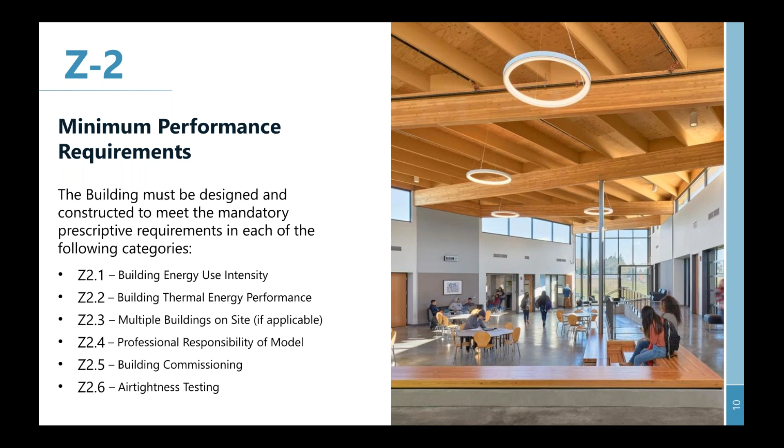Drilling down into building energy use intensity, the performance index known as the ZEPI index is expressed by the EUIP divided by the EUI times 50.4. The EUIP is the energy use intensity for your proposed design, and the EUI is a baseline calculation based on source EUI. This is a lot different than what has been used in the past.

Generally, when projects have calculated the baseline energy use intensity, it's been based on just the site, but in this calculation, it takes into account not only the site, but the efficiency of the source. So the ZEPI number is the EUIP divided by the EUI times 50.4, a dimensionless number, and that number must be less than or equal to 30 to be in compliance.

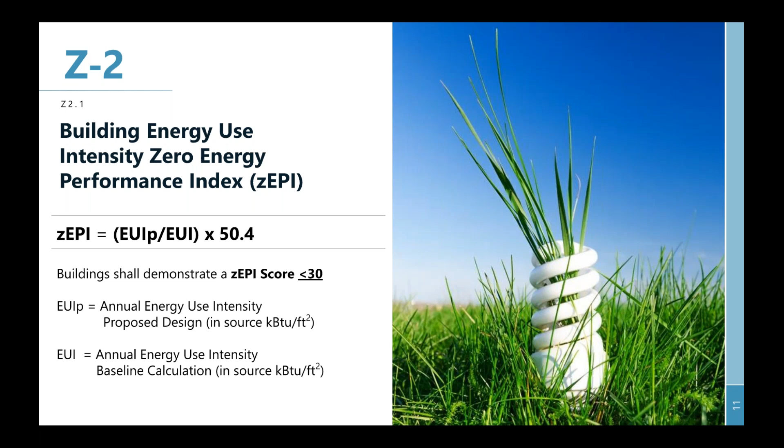The calculation parameters must be done in accordance with Appendix G, ASHRAE 90.1 2016. Again, the current code, if you were to follow a LEED compliance path, is 2013. The appendix, the ASHRAE 2016 version, is quite a bit different than 2013. The methodology used to determine the EUI is very different, and overall the 2016 code is more stringent.

Modeling inputs must be in accordance with the ComNet Rules and Procedures Manual. I've provided that link. So for calculating the annual energy use indices, electrical energy shall be converted from kWh to kBTU units, 1,000 British thermal units, measured at the utility meter or metered point of delivery. This value shall be multiplied by the dimensionless conversion factor of 3.28, site source factor based on the eGrid subregion 2010 RFC East, as stated in table Z2 1.2.2 of Appendix Z.

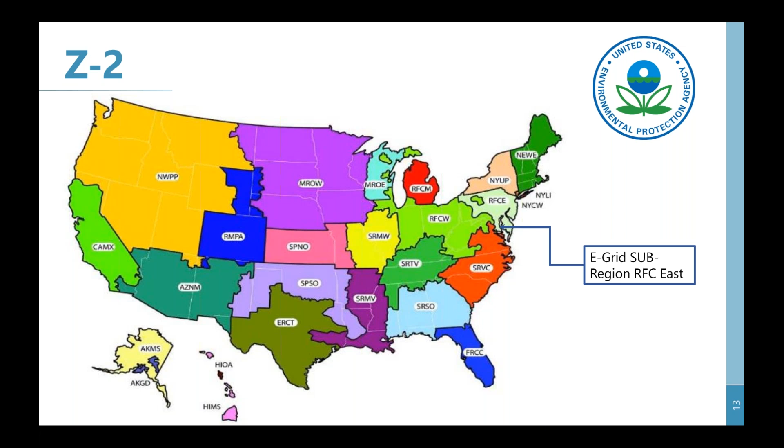Going further into section Z2 for building thermal energy performance, not only does the overall project need to demonstrate a level of efficiency based on that ZEPI number, but in addition, you also need to demonstrate that you are under a maximum annual heating demand of 4.2 kBTUs per square foot per year, and under a maximum annual cooling demand of 6.4 kBTUs per square foot per year. Based on ICFA, the interior conditioned floor area, is how the methodology for determining the square footage works. So those are two critical numbers, 4.2 for heating and 6.4 for cooling.

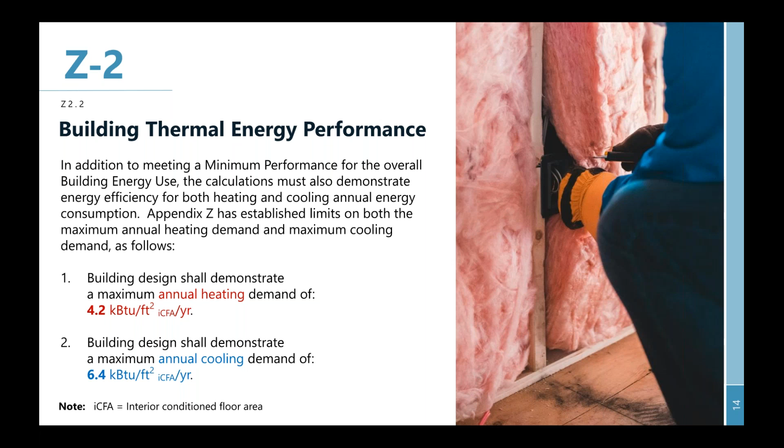When you have multiple buildings on one site, each building must comply with sections Z2.2.1 and Z2.2.2 within Appendix Z, or the combined demands of the buildings on the site shall comply. So each building site employing district energy systems, the energy shall be assigned to each building proportionally based on the gross area. So if you had an on-site heating plant, you would distribute that energy, or that demand I should say, across each of the buildings based on the proportion area.

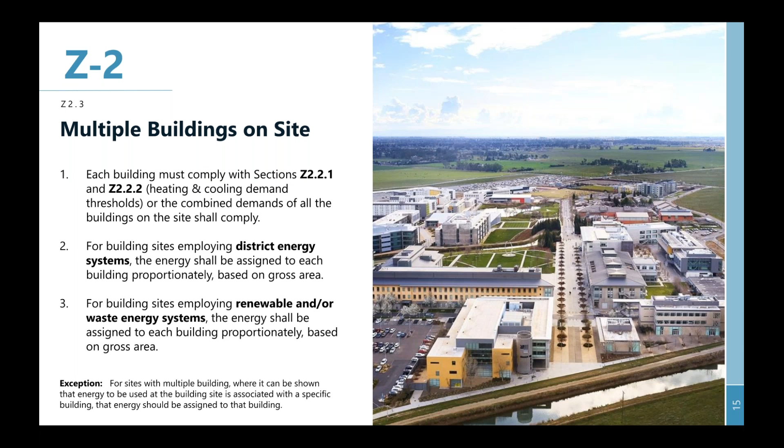So for building sites employing renewable and/or waste energy systems, the energy shall be assigned to each building proportionally based on gross area. The exception is where it can be shown that the use of the building on the site is associated with a specific building.

Another requirement of Appendix Z is that a registered design professional be in responsible charge of the building energy simulation. So the owner shall engage the services of a registered design professional in responsible charge of energy simulation. The registered design professional shall be named on the permit application, and the design professional shall be certified by an approved accredited entity as determined by the code official.

The owner will be required to notify the code official in writing whenever that registered design professional is changed or unable to continue to perform his or her duties. So through this Appendix Z, they're really elevating the significance of the energy model and the qualifications of the individual or individuals producing these energy models, and also ensuring that these individuals are carrying through the entire project. And if not, it needs to be communicated to the district.

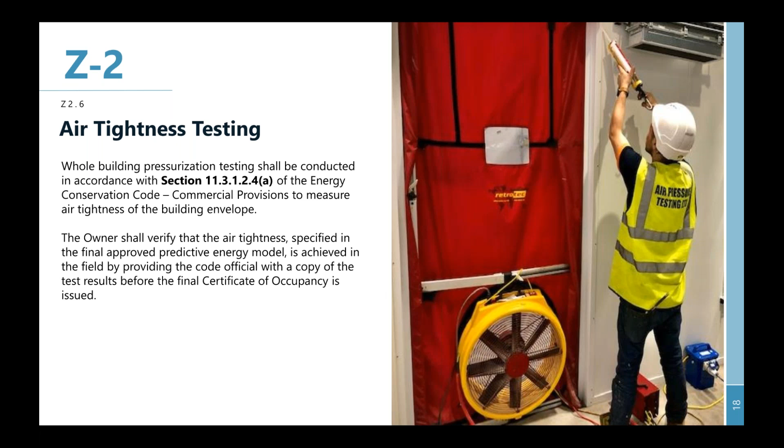The owner shall verify that the air tightness specified in the final approved predictive energy model is achieved in the field by providing the code official with a copy of the test results before the final certificate of occupancy is issued. What this means is assumptions are made in the energy modeling regarding how tight the building is. This air tightness testing must verify that you are achieving at least that level of tightness. If those two things don't match up, it is possible that you may not be issued your certificate of occupancy.

I'm going to turn it over to my colleague Kulai to take us through Z3.

Okay, so Z3 is dealing with renewable energy, and it's looking at the building and the site around the building for the total power generation. These formulas are formulas that we produced, you're not going to find them in Appendix Z. PG is power generation, and power generation is made of power generation on site plus power generation off site. The power generation you calculate needs to demonstrate that it is bigger or equal than the energy use intensity proposed for the project.

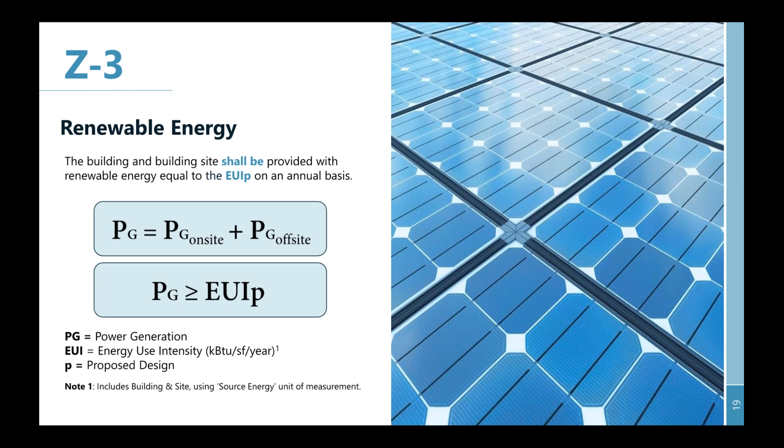The second requirement on Z3 refers to on-site combustion. The on-site combustion of fossil fuels will not be permitted for the provision of thermal energy to the building, except as specified by the code official. In other words, natural gas generation for thermal use should not be used anymore, and electrification should be provided for the building itself.

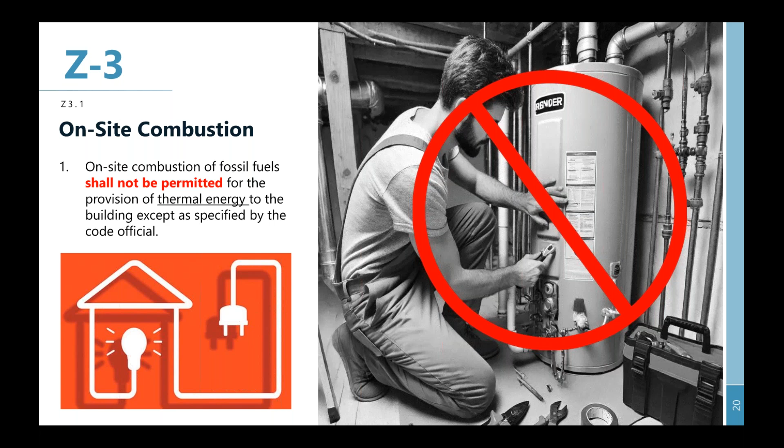Sorry. That's one. That's just slow, sorry.

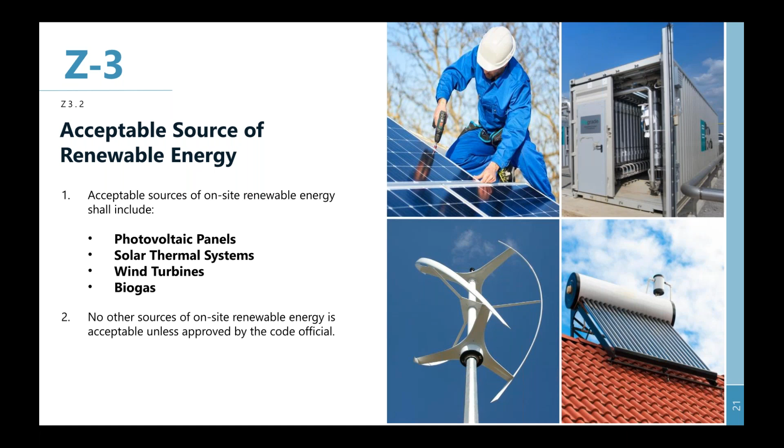The renewable energy on site: how is the quantity of renewable energy on site determined? The on-site renewable energy shall be generated whenever feasible, and 'feasible' is quite loose, it could be interpreted various ways. But numbers 2 and 3 specifically ask for specific numbers: a minimum of 5% of the total building energy consumption, EUIp, shall first be met by an acceptable source of renewable energy installed on the building roof or site. So they are very specific, 5%.

Now, for a project generating on-site renewable energy through a solar photovoltaic system, a minimum of 25% of the total site area, including building footprint, shall be allocated. It doesn't say that you have to put 25%, as long as the EUIp is met, I think they are okay with that. The exception here is where there is no adequate solar access as determined by Chapter 13 of the Energy Conservation Code commercial provisions, you don't have to meet this requirement.

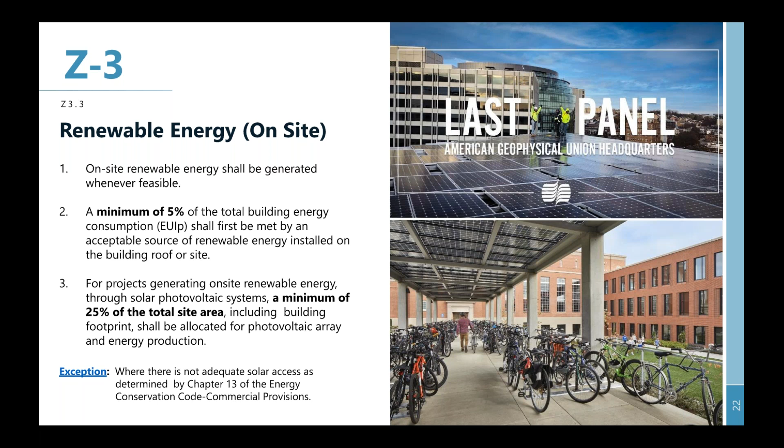For renewable energy off-site: if you determine that on-site is not possible to provide enough renewable energy, then Appendix Z allows you to purchase renewable energy from off-site. Energy must be procured from a qualified electricity supplier providing energy from Tier 1 renewable energy sources, meeting the minimum percentage of DC's renewable portfolio standard. DC provides the renewable energy portfolio standards every year, indicating a long list of suppliers of Tier 1 renewable energy. Tier 1 means the suppliers provide renewable energy by PV, thermal solar, biogas, wind, and also hydroelectric.

But the hydroelectric needs to be less than 30 megawatts. I don't know many hydroelectric plants around our area that are capable of providing less than 30 megawatts.

The following methods of procurement are acceptable: power purchase agreement, which is the most used in the area, for a minimum of 5 years from solar or wind facilities located in the DMV area, connection to a renewable energy microgrid, and connection to a low carbon neighborhood thermal energy system. I don't know too many energy microgrids or low carbon neighborhood thermal energy systems in our area yet.

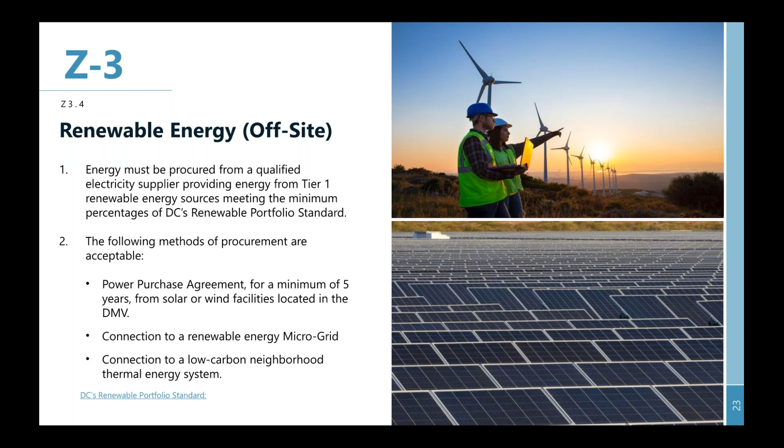Moving on to the requirements of Z4, energy metering, monitoring, and reporting. These requirements apply to all projects using Appendix Z to ensure that buildings are constructed or altered with the capability of measuring, monitoring, and reporting on their energy use, production, and reclamation.

This includes the design of energy distribution systems to allow for the isolation of load types, the installation of meters, devices, and data acquisition systems, and the installation of energy displays and other reporting mechanisms.

So not only do we need to provide metering for the systems, but under Appendix Z, they're looking to be able to isolate the specific load types.

Can I say something?

The submetering system they are looking for is usually by separating the loads into receptacle, HVAC, lighting, and equipment, and that can be done easily by designing your distribution so that it's separated by that type of load.

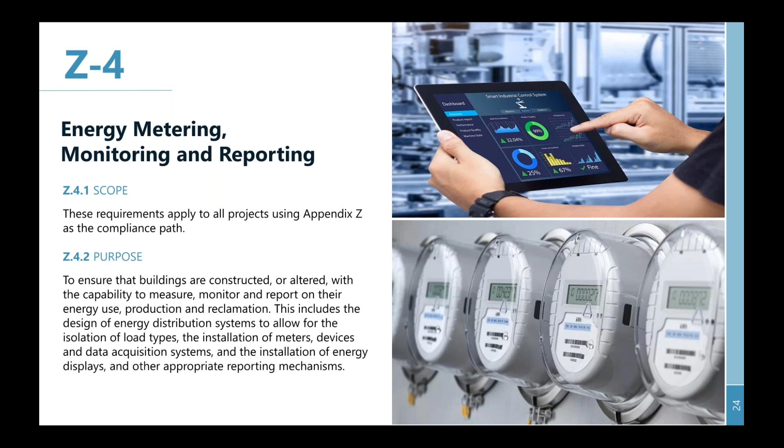And so all forms of energy delivered to the building site, or produced by the building site or in the building, shall be metered, and all energy load types measured.

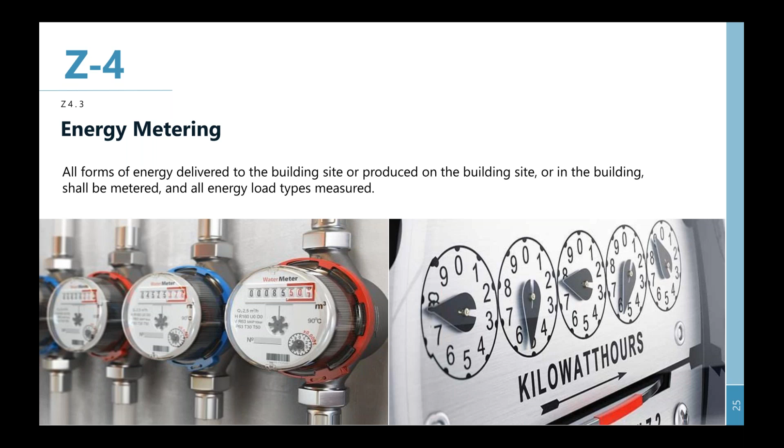So within the ventilation system, part of the code is they're looking to understand the ventilation rates into the individual buildings, and looking to have the ability to not only measure how much ventilation is coming into the building, but to maintain historical data regarding these ventilation rates.

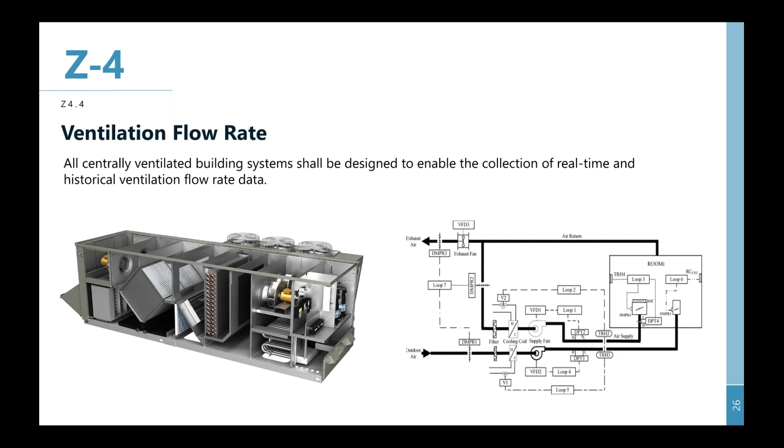So within the building's mechanical systems, we must have devices capable of measuring and reporting that flow, such as airflow measuring stations associated with a DOAS unit. The building would be an example.

You want to talk about grid integration? Sure. In places where there are equipment constraints in the distribution network, net metering is impossible to provide because the utility doesn't accept it for some reason, the on-site storage option shall be considered.

Something I want to underline is that this is the only location in Appendix Z where they talk about on-site storage. I'm not so sure how they are looking at it, other than when net metering is impossible on site, they are going to react. These systems are expensive, they are very difficult to control, and they require a lot of specialty equipment to be monitored.

I think it's one area within Appendix Z where there's a little bit of leeway. It's essentially saying you must net meter the building, and if for whatever reason you cannot net meter the building, that you should consider on-site storage options. It doesn't say you must implement on-site storage options.

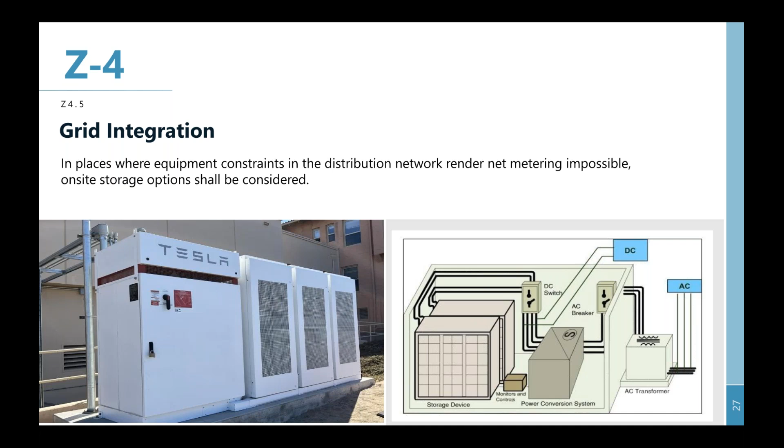So Z5, post-occupancy measuring and reporting. This is post-design, post-construction, when the building is now operational.

There is a requirement for the owners to annually benchmark and report on their energy and water performance through the Energy Star Portfolio Manager tool, and this includes the renewable energy generation and green power usage pursuant to DCMR 20-3513.

And performance verification: within 24 months of occupancy, the owner shall submit documentation demonstrating 12 months of continuous operation with no less than 90% occupancy, where the energy consumed by the building and the building site is equal to or less than the renewable energy associated with the building and the site.

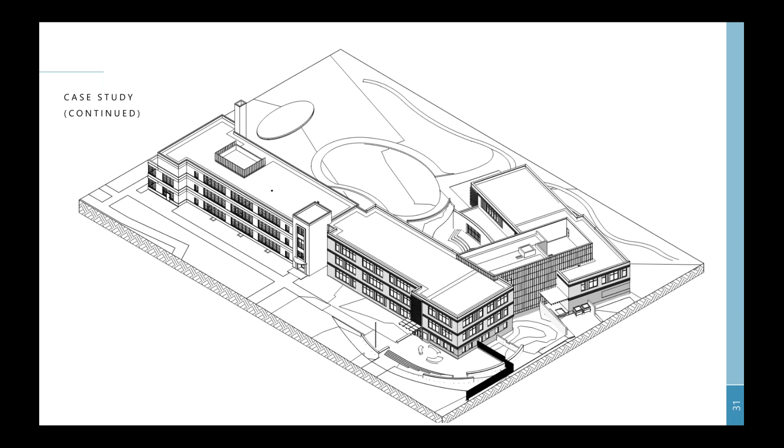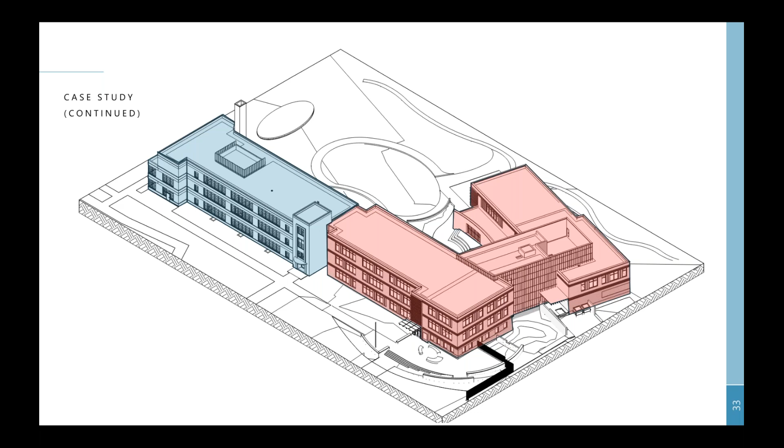So here's a diagram of the school. This area in blue is a portion of the current elementary school, which is being maintained and is going to be renovated to meet the Appendix Z criteria. The rest of the existing school will be demolished. What is in red here is the new portion of the school, which will be added on. But the entire project must demonstrate compliance with Appendix Z.

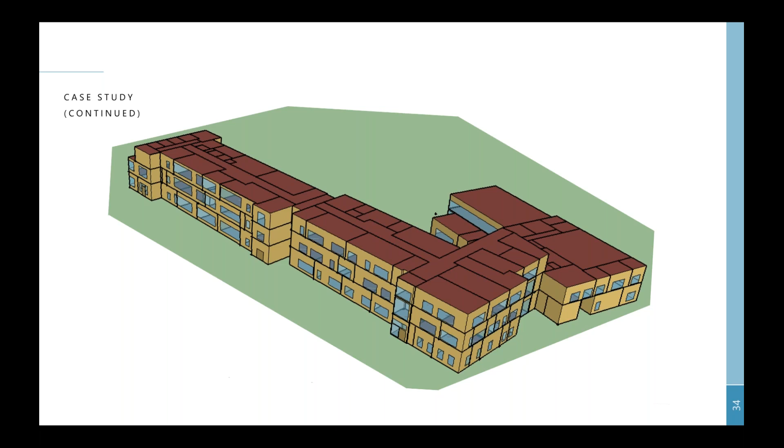So from a design standpoint, one of the first things we need to do is build a proper energy model that is reflective of the design that has been proposed, so that we could test various strategies, measures, and technologies.

Some of the technologies and strategies that have allowed us to reduce energy by that amount have to do with the incorporation of a full-scale geothermal system connected to water source heat pumps. That system has given us a much smaller energy footprint, and our lighting systems and lighting control systems have also allowed us to save quite a bit of energy compared to the baseline. One thing you'll notice is that pumping energy actually increases with the proposed design, and this is because of the introduction of the geothermal system and the pumping through that system.

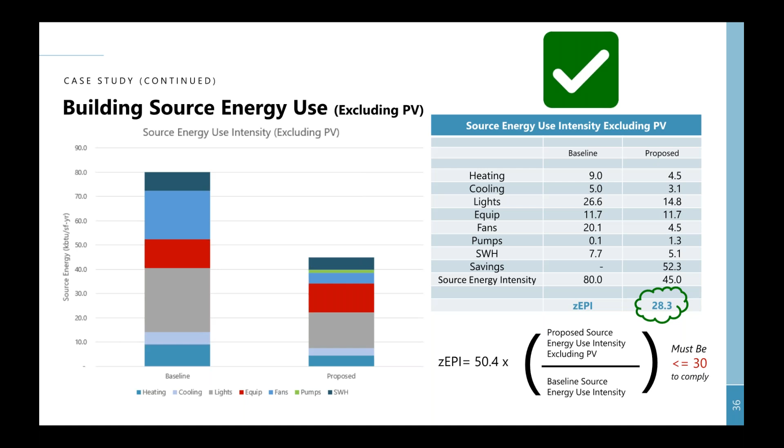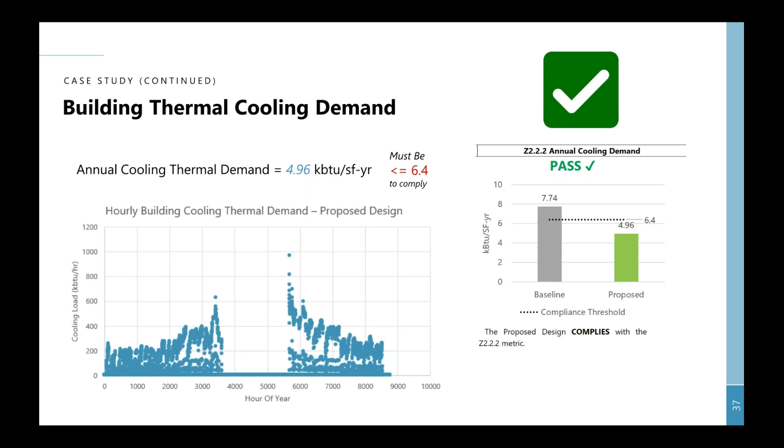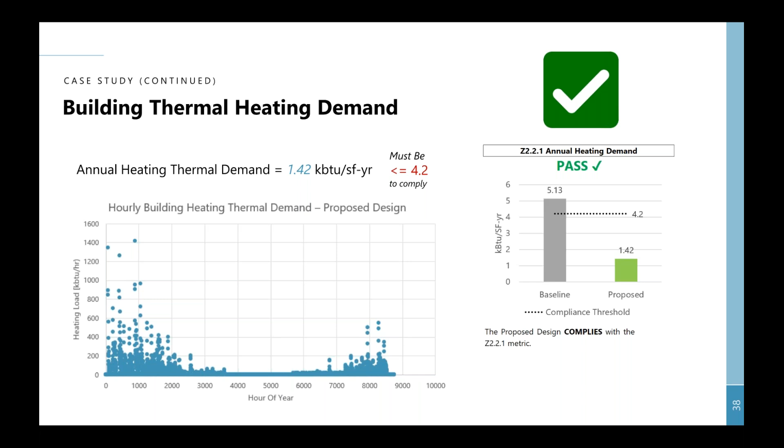And then when we look at on-site solar energy, we've modeled this through the course of the year. Our calculations show that we should, in a typical year, be able to produce...

So as long as PG is greater than or equal to EUIP, then we pass the test with respect to the Z3 renewable energy.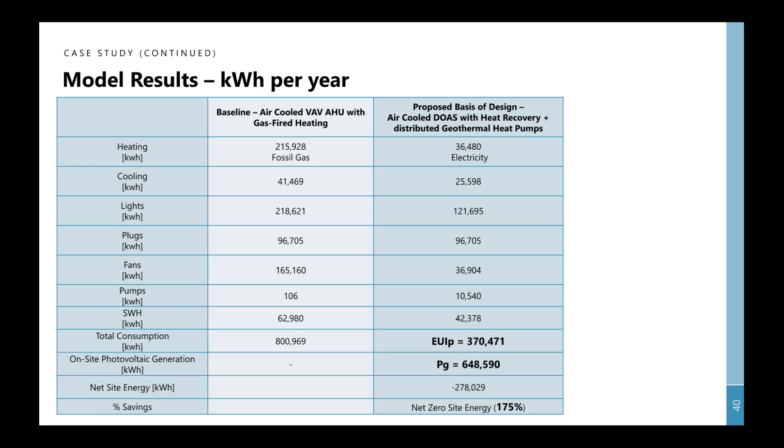Utilities are not maintaining those infrastructures very well, and there are possibilities of major failures. So the District of Columbia and other areas in the United States are looking to have energy production on site as much as possible, just to take out from the equation or from the transmission lines as much power as possible and still maintain the distribution, you know, live. But there are major concerns, not only here, throughout the United States.

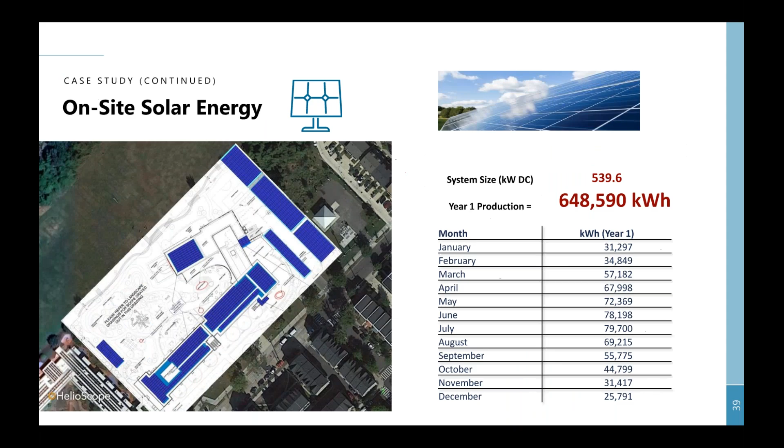I'm going to add one more thought onto that. When we look at the breakdown of buildings and how they've been designed in the past, the bigger loads in the building tend to be on the cooling side, and with lights and equipment, say in an office building, those have always been electric powered and will continue to be so. So the shift really is on how we heat buildings and how we heat our hot water. I think that's really the big shift here — those are the numbers that are moving from what has been predominantly natural gas fired in the past, to electric within the city.

But you bring up an interesting comment, because the baseline systems for ASHRAE Appendix G, heating is fossil fuel. It's gas-fired hot water, gas-fired boilers, and domestic hot water is fossil fuel. And when you go to source factors, on-site fossil fuel — we saw 3.48 for the electric going to the source, the site to source factor. For gas it's like 1.1. So when you're going to the source numbers to do the ZEPI, there is a penalty inherently in electrifying it. That's why what they don't want you to do is just electric resistance heat.